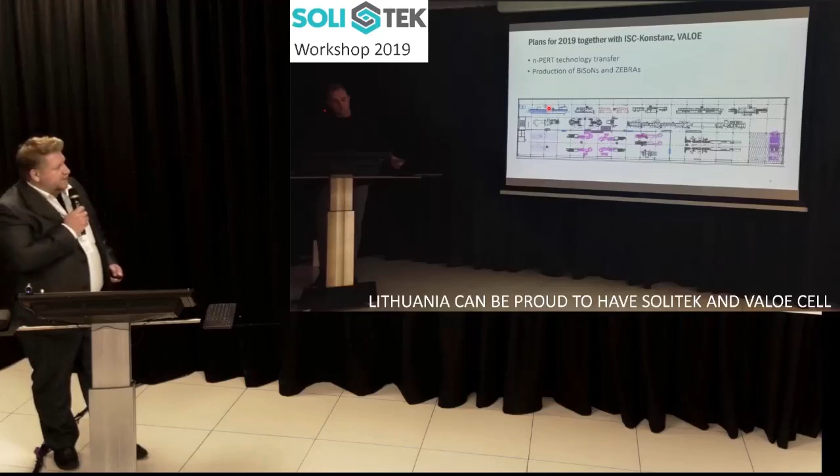And what Valoe is doing, I told you, IBC solar cells, and they are mostly cooperating with Sono Motors to put the solar cell into the car body. So that means in future we will not have only electric cars, but also self-charging cars. And the idea here is, if you have the entire hood equipped with a very effective IBC solar cell, if you leave the car outside, you can charge 30 kilometers a day. So if you are using it only in the city, there is no more charging of the car in future, which is quite interesting. Of course, it's a little bit more expensive, but it pays off in future.

Good. So 2022 is a perfect year for photovoltaics. As I told you, the hunger is there. Since 2020, PV became, with the PERC technology, the king of energy markets. And in March this year, we installed a total capacity of 1 terawatt. And the plans are huge. So Europe wants to install this year 60 gigawatt, which is about 2 to 3 times more than last year.

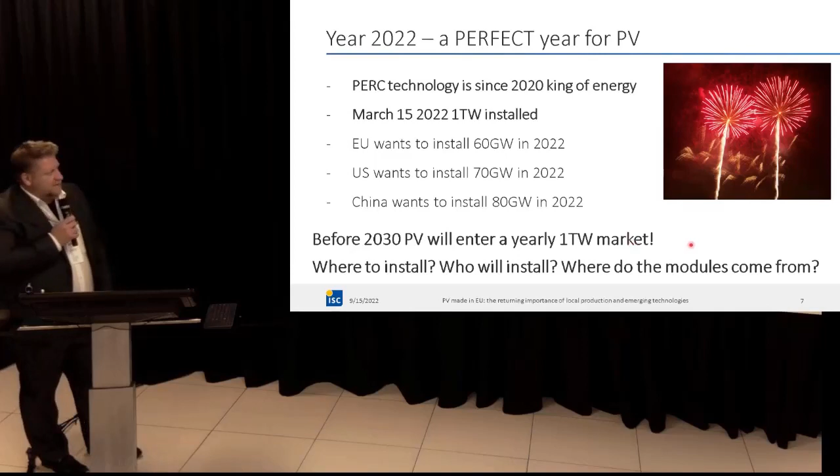And this happened from 2008 already on. So if we learn from the past, and I think we will even accelerate now, that means that in 2028 we will enter a yearly 1 terawatt market. That means the capacities these days are at about 300 gigawatt yearly, so we have to triple this, and that means that there will be room for new investments and new factories out there.

So the US now has some good policies to really accelerate the PV production again. And I think we will hear from Žygimantas what will happen in Europe, and hopefully we will be successful as well.

Yes, so the content: ISC Konstanz, I will show you 5 slides, then some arguments about PV in the EU, and also show you the most important players in Europe, then about PV technology, and at the end I will show you just some examples for bifacial PV.

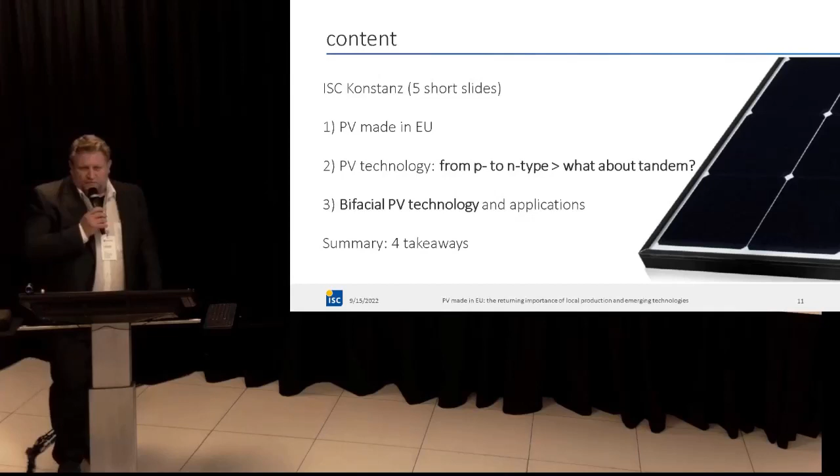So ISC Konstanz, we were founded in 2005. This was the golden time of photovoltaics, where we cooperated with SolarWorld, Bosch, there were many producers. And when everything went to China, ISC Konstanz was involved in technology transfer. So transferring our technology that we developed with Bosch, for example the N-type technology, to India, China, but now also to Valoe. And we are focused on solar cells, modules and energy systems, but do not have different companies, but departments.

So we are involved in technology transfer of PERC technology, this is the main technology now that SoliTek is producing, TOPCon and the IBC solar cell concept. Yes, these are our references. So we started technology transfer after Bosch stepped out in 2015. So we bought our common patents and transferred one technology to Megacell. It was an Italian company, then to India.

Yes, the undisclosed Asian customer, it was REC. Then SPIC is our biggest customer at the moment. And as I told you, Valoe. Here under this roof, they are producing IBC solar cells.

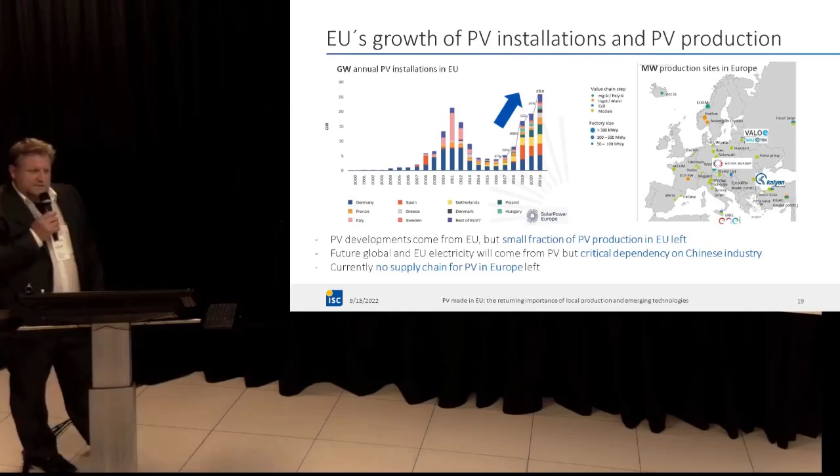So China just cannot produce cells and modules for all the countries anymore. And I think that the big EPCs and companies that want to install modules are already feeling it, that there is a lack of modules out there, and it will be even worse in future.

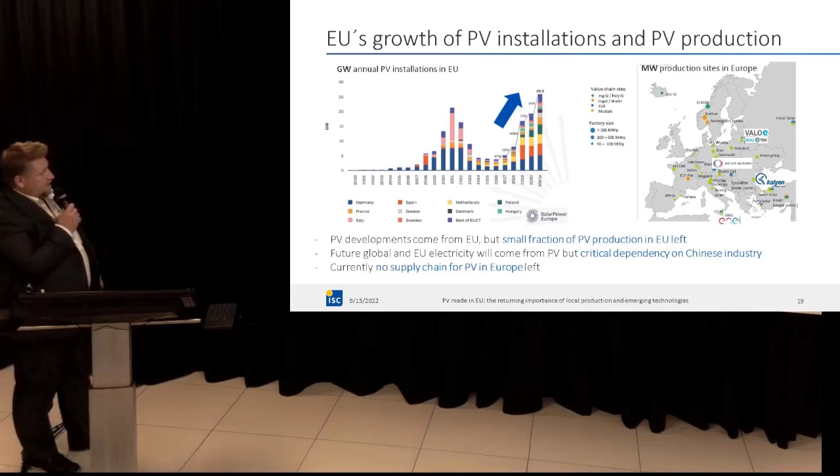And this is my mission now with the European Solar Manufacturing Council and Žygimantas in the lead for the politics: to bring photovoltaics back to Europe. But Europe is quite slow with their policies. I mean, in the US now, President Biden signed a contract for subsidizing production in the US. This is unfortunately not possible in Europe. But I'm quite optimistic that we will also make some good decisions.

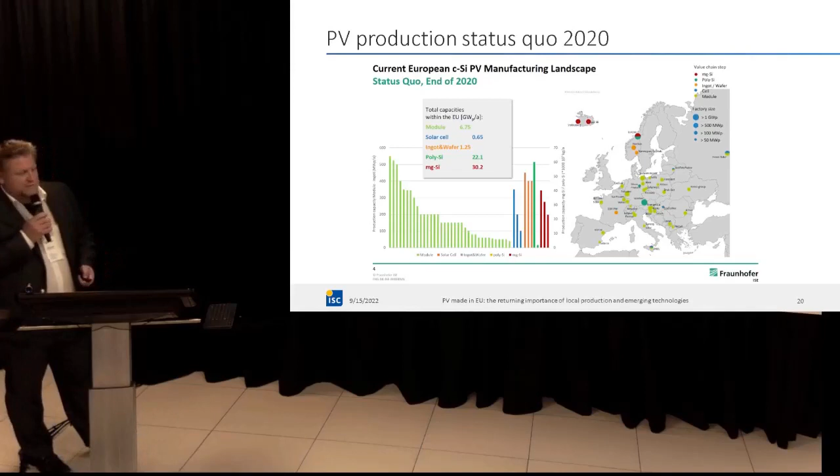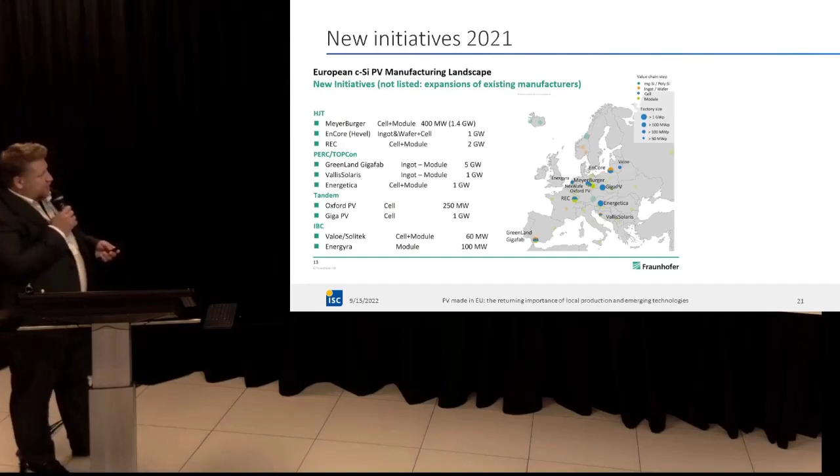So here you see the new initiatives in 2021. What happened? There were many announcements out there. So for example, Meyer Burger was announcing to go to production, and they actually succeeded. So here in green you can see which projects were successful or which projects are online.

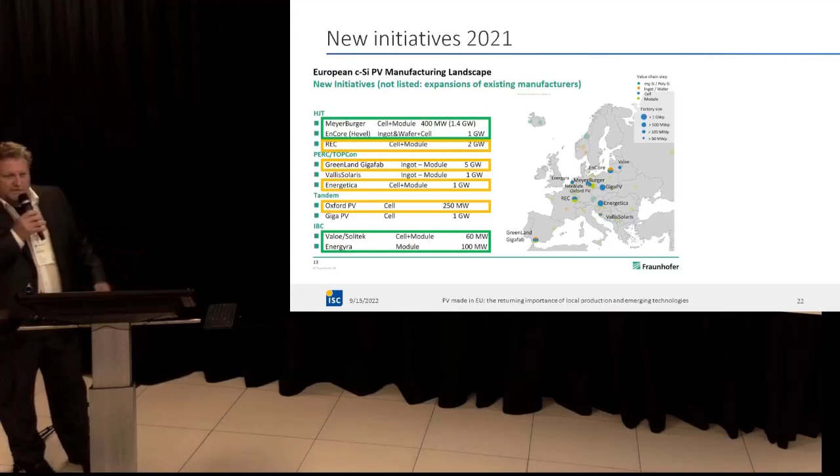REC, they have big plans to go into heterojunction production in France. Greenland Gigafab unfortunately is now on hold. Energetica was insolvent, but I think they are restarting. And there are also some tandem activities. Oxford PV is planning to go into tandem production. I will tell you later on what this technology is about.

But as I told you, Valoe cell under the roof of SoliTek are also producing cells, IBC cells, and Energyra, that's a company from the Netherlands, is also producing IBC modules out there.

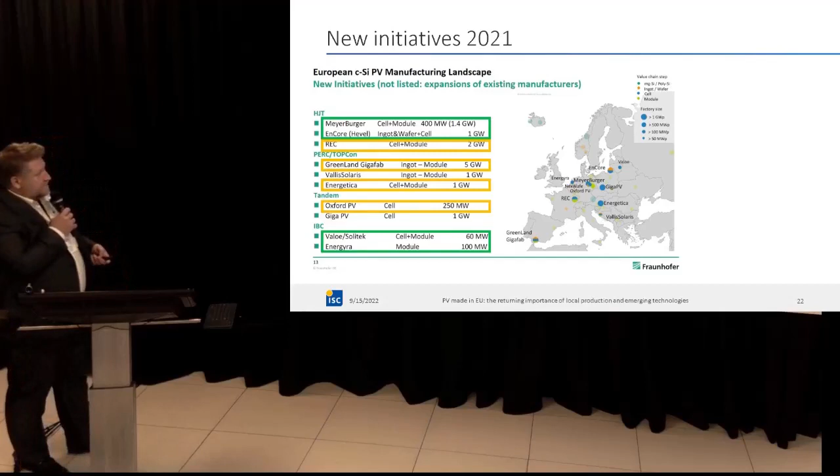The new players, for example, I think you heard the news that ENEL is now going to gigawatt production. As I told you, REC, Carbon now are making advertisement for 20 gigawatt, and they really mean it, and they go vertical integrated, like starting from ingot to modules, because if you start a solar cell production only, maybe you will not get the wafers. If you want to be really independent, you have to produce vertical integrated, like all the products. And it's not only about wafers, but it's also about polysilicon, about glass.

And this is what we are now starting in Europe, actually, to build a big consortium to go into production, similar to the Airbus that we did with France and Germany a couple of years ago. And there is also a company in Turkey, KalyonPV, that increases their capacity now to 2 gigawatts. They are producing already 1 gigawatt vertical integrated PERC from ingot to modules, and now they are moving, similar to SoliTek, also to N-type technology, to TOPCon.

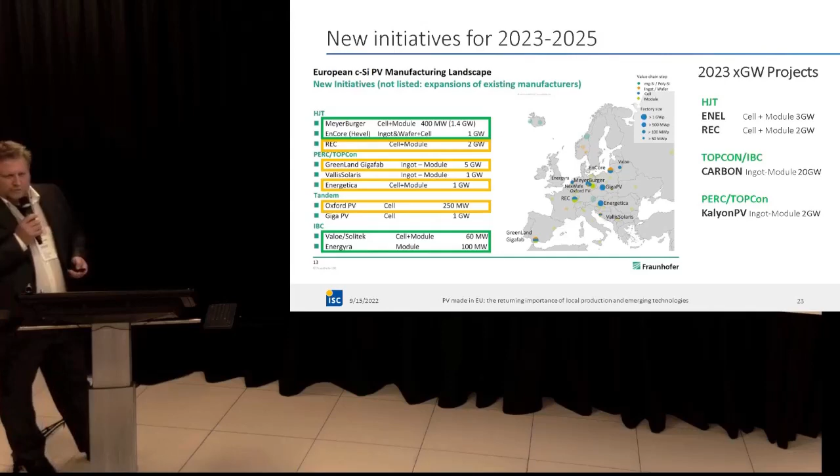Yes, I think I can skip these slides. Sigimantas will tell you more about it, what is necessary in Europe, what kind of measures we have to take in order to bring PV production back to Europe. And yes, I can skip this one.

We have now a big European project with many partners, mainly also machine builders from Germany, Rena, Centrotherm, to develop a new version of the IBC solar cell. We call it IBC for EU, and we are quite sure that this technology can be a strong argument to bring PV production back to Europe again.

And about the PV IPCEI, which we are now doing, I think Sigimantas will report more about that. But in very general, PV IPCEI is an important project of common European interest. And if Europe agrees that photovoltaic production is an important technology, which they already did, and countries like Lithuania are very committed, Spain, and we are now in the process to submit proposals for the new technologies that will be produced in Europe, then Europe will in future be able to subsidize PV production. The countries where the commitment comes from will be able somehow to subsidize, which is not so easily possible in Europe. You will hear more info about that.

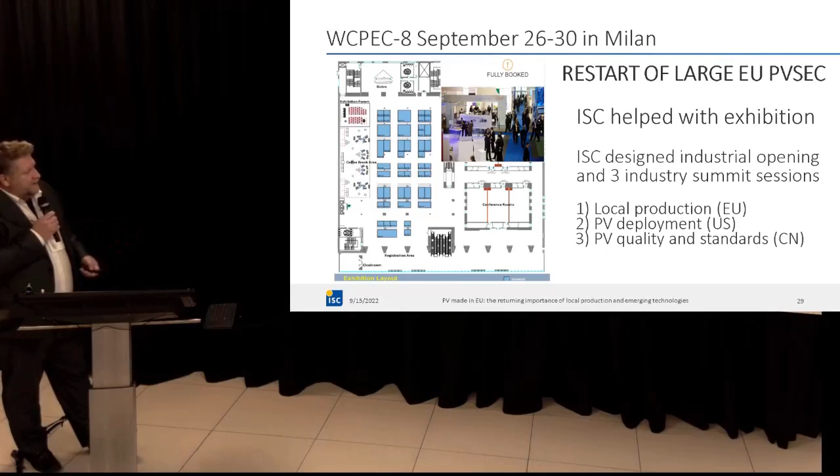Okay, and for an important PV technology to be really successful, we have to do it all together. And this year in Milan, in September, there will be a world conference on photovoltaics, and for the first time after a couple of years of PV desert, the exhibition is now fully booked. So I am very happy that we will meet there and discuss how we can really achieve to bring PV back to Europe.

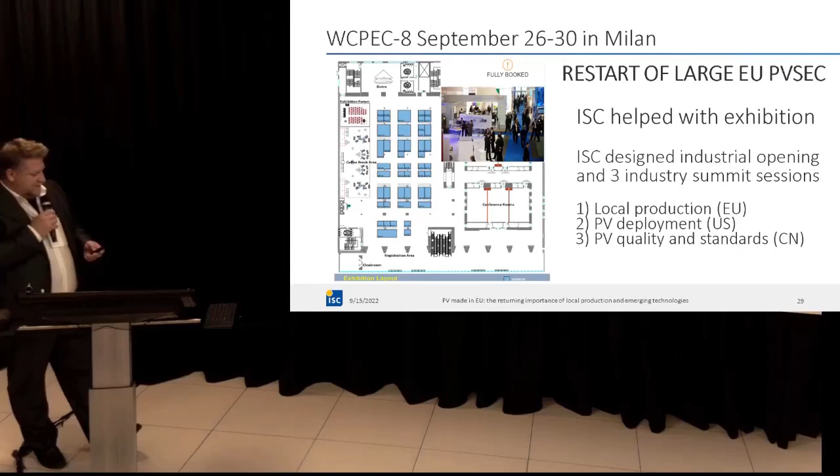Okay, so these were quite political things and some information about what is happening in Europe, but now about PV technology, and I always call it entering the bifacial N-type era, because P-type, like the PERC solar cells, come to their efficiency limits, but now it's time for N-type technology, and I will tell you why.

But maybe you heard about it. There's a big discussion now, should we buy polysilicon from China because of forced labor and things like that. So we need actually also to install more polysilicon production in Europe. And we have a big polysilicon producer, which is Wacker, but they normally use this material for the electronic industry. So we have to convince Wacker to scale up their polysilicon production.

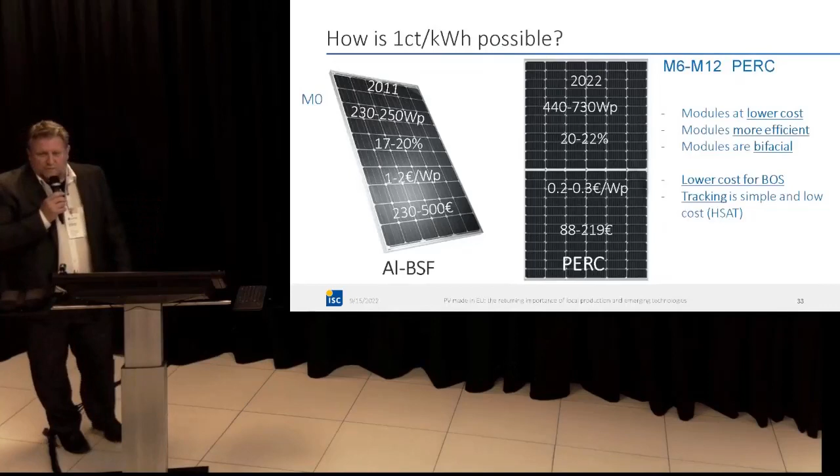As I told you, PERC is the king of energy markets these days, and that's the major product of SoliTek. So if you look at the modules 10 years ago, not only was the power smaller, but also the design was kind of different, like full cell and smaller modules. Now we have half cells and so on. So the modules are at lower cost because of higher power, a more efficient front side, but also because of bifaciality. And if you combine it with the lower cost of balance of system and also tracking, then 1 cent per kilowatt hour is possible.

Of course, the average is not 1 cent. In Saudi Arabia, they have different financing models. So the average is about 3 to 4 cents per kilowatt hour these days. But how can we go even below that? So that means you have more kilowatt hour per kilowatt peak for the PERC module compared to the aluminum back surface field. And how can you go even below that is to go to N-type technology.

It's very related to the PERC technology, but you are changing to the N-type substrate and also partly the process. But let's say the PERC production sites can be upgraded. And then you have even more efficient modules. You have seen the forecast of the power. Then very important is also less degradation and a lower temperature coefficient. That means if you are increasing the voltage of the module, then the temperature coefficient is lower.

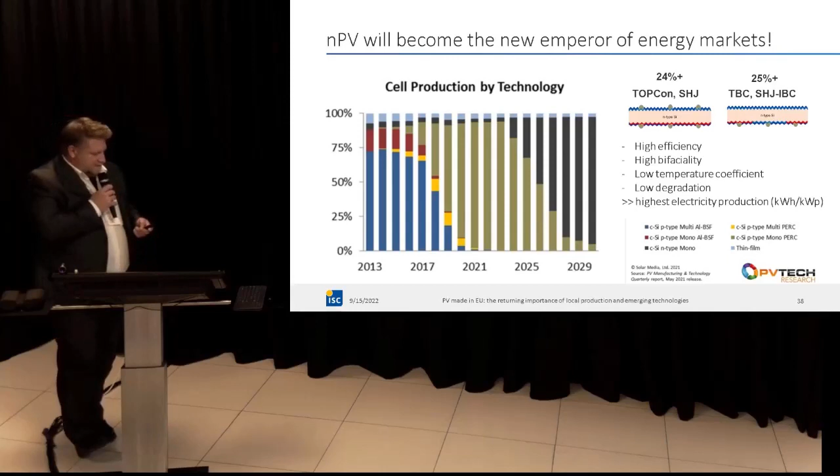So what will happen in future is that we will have a similar change to N-type now. So this is the PERC, and we are now in 2022, so about 10% of the market share is N-type, but analysts believe that it will be also a fast change now to N-type, similar as for aluminum back surface field and PERC. So this is, I would say, the most important slide for you to understand.

It's a technological slide where you can see the yearly improvements of the efficiency on the PV market. And as I told you, in 2016-17, the aluminum back surface field came to its limits, mainly because of the rear side passivation. So actually every improvement is based on better quality of the passivation of the solar cells on the front and on the rear side.

And so what actually mainly changes is the voltage. So for aluminum back surface field, you had voltages of about 660, a little bit more. Then for PERC, you can go to 680, maybe 685 with selective emitters.

But to go above 700 millivolt, you have to change to N-type and to so-called TOPCon technology or heterojunction and IBC. And there you can see also that you are not only passivating the rear side better, but also the bifaciality is enhanced. Here you can see the open side of a PERC solar cell, and because you are using aluminum, the bifaciality is about 0.7, and here you can go even to 0.9 or even above that.

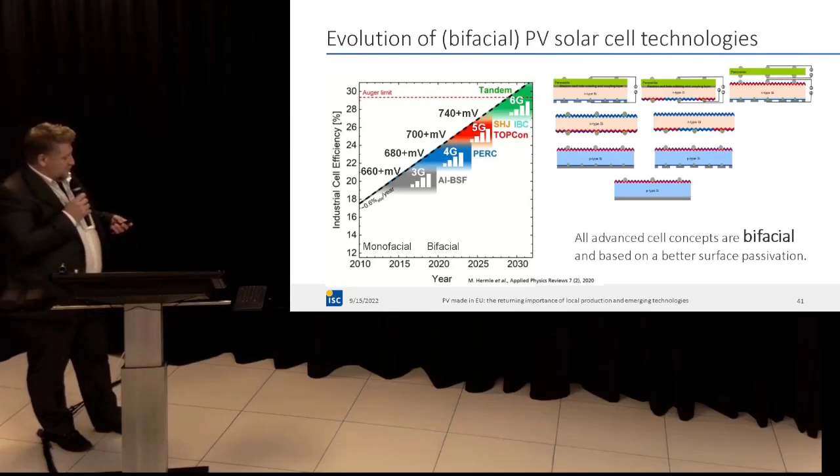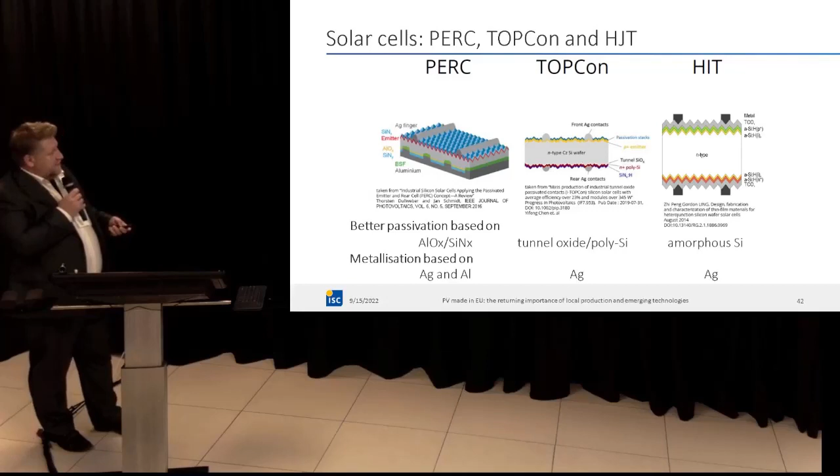So the efficiencies are increasing, and as I told you, PERC is the working horse, TOPCon is the major challenger. I believe that heterojunction will still stay in niche markets, but the interesting thing is that they have the highest bifaciality. And IBC is the holy grail, actually; I believe that after 10 years of development, everything will run on IBC technology.

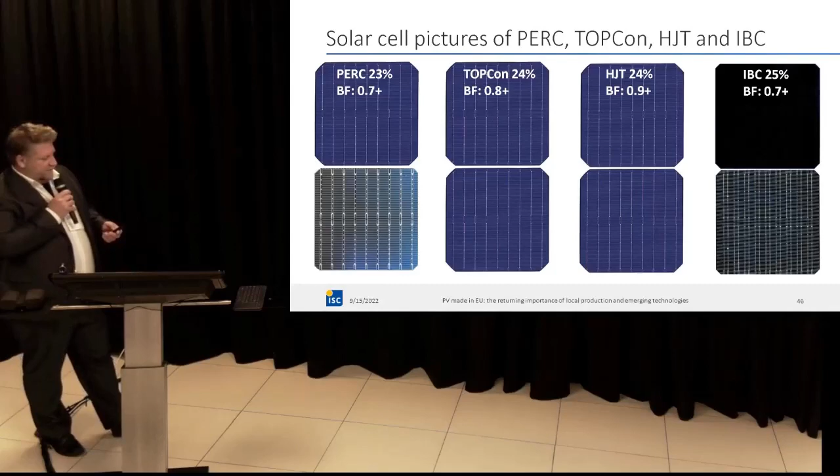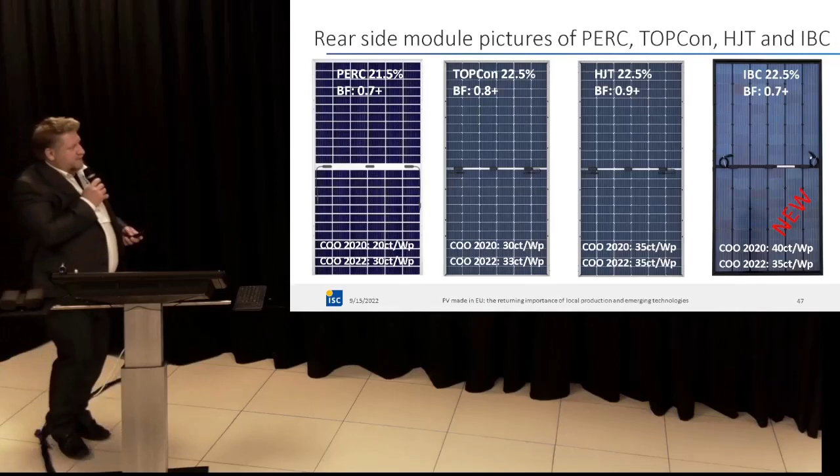Here you can see the pictures of the solar cells from the front and from the rear. The IBC cell is, of course, different from the others, so you don't have any metal on the front side, but both polarities on the rear side. Here you can see the modules. IBC technology can also be bifacial, even if there is quite a lot of metallization on the rear side. But all technologies look, of course, quite similar in modules.

If you look at the highest efficiency modules out there, the highest efficiencies, of course, are N-type technologies, but for the moment they are still a little bit more costly than PERC, and that's why they are used mainly for rooftop application or for building integration.

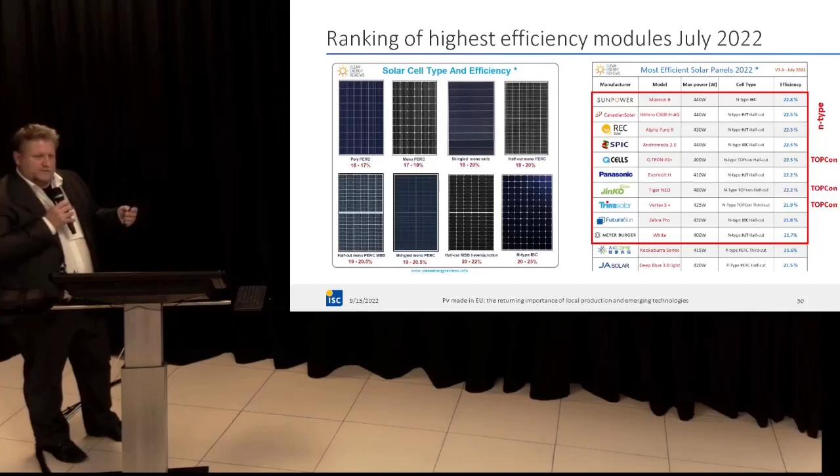Future material challenges, as I told you, polysilicon. We are currently in a polysilicon crisis. Silver has to be reduced because N-type technologies are using silver. Heterojunction has one more disadvantage, the indium that is included there, and also glass and aluminum. If we enter a yearly 1 terawatt market, it will become not a problem, but a challenge. And it has been also mentioned by SoliTek that circular economy with effective recycling will be more and more important, of course.

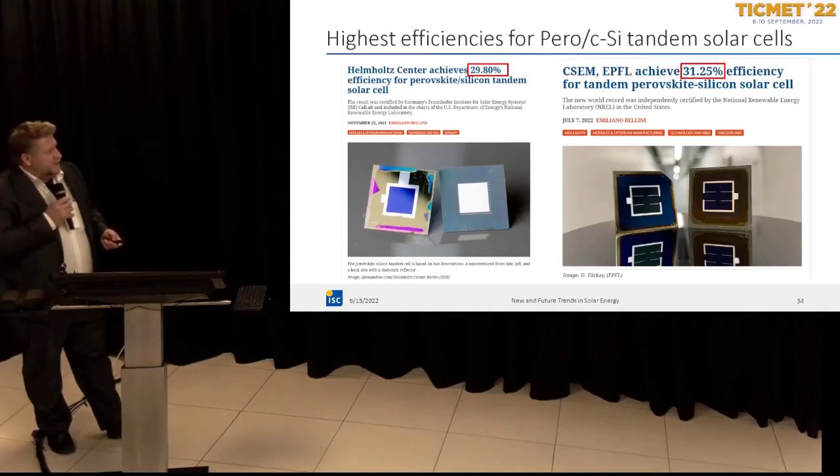Yes, I already told you, tandem technology, there are many high efficiencies out there, even exceeding 30%, because putting another semiconductor on top of silicon, you can go above the Shockley-Queisser limit. But the challenge is the stability and many other challenges. Nevertheless, I explain to you very shortly the different arrangements of tandem technology.

You can go for 2-terminal, where you have directly on the silicon the perovskite, and you have the polarities on top and bottom. If you are using an IBC solar cell, you have a so-called 3-terminal solar cell with 3 polarities, or we are putting 2 modules on top of each other, and then you have 4-terminal. I'm a big fan of 4-terminal, even if you have 2 modules on top of each other, which sounds costly, but it's, I think, the easiest way, because you don't have to do the so-called current matching.

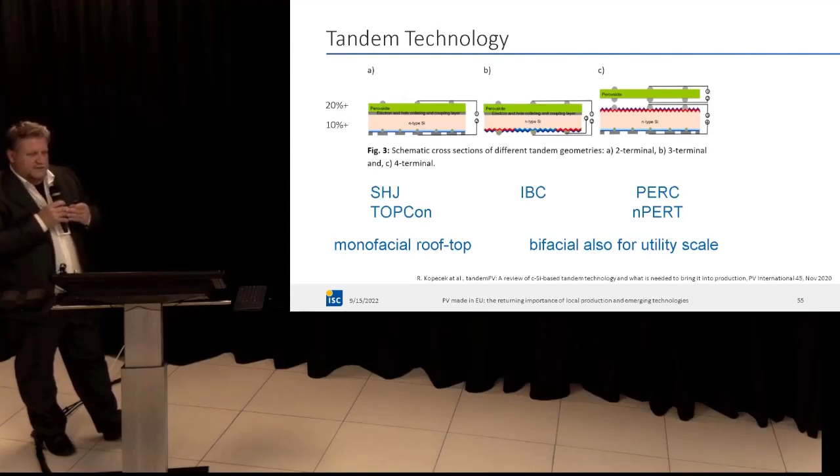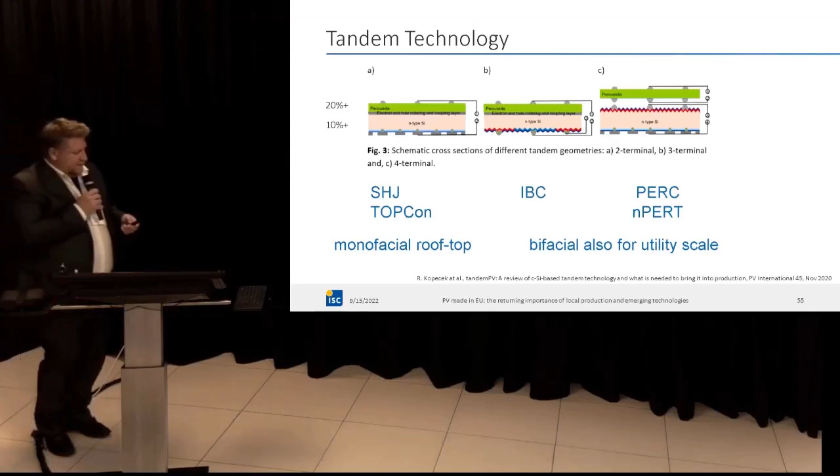Here you have to really adapt the 2 semiconductors towards each other, and that's extremely complicated. So putting 2 modules on top of each other makes more sense, and also you can have quite good bifaciality for this kind of arrangement. But I think it will take more than 10 years for this technology to be visible. What I mean by visible is that we have about 5% market share. Of course, there will be companies like Oxford PV with some niche applications for rooftop or maybe car applications, but really in big scale, it will take a lot of time.

How much time do I have? It's 5 minutes? Ah, that's perfect.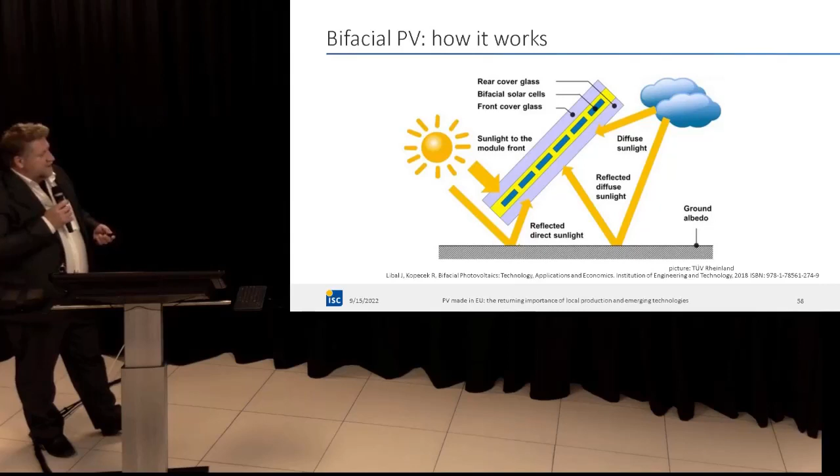So now I show you some pictures of bifacial technology. Here you can see how it works. The front side is still more important than the rear side, of course, but depending on the clouds or the albedo of the ground, you have quite a lot of power also coming from the rear side. And when we started to do advertisement for bifaciality, already in the year 2000, there were not many believers because they were selling modules without any problems, whether bifacial or not. But in 2018, people were thinking to diversify from the other producers and going bifacial.

I think the biggest company at that time that really made the difference was Longi, a big producer that was saying that bifaciality will be the future. And in Europe, SoliTek was one of the pioneers that brought bifacial modules on the market. But from now on, I think it's quite clear that bifaciality is the winner, and not because it's a big revolution, it's just an evolutionary process. I told you the evolution of the solar cells. They become bifacial anyhow, and people are making glass modules anyhow, so it's just a logical consequence that bifaciality is gaining importance.

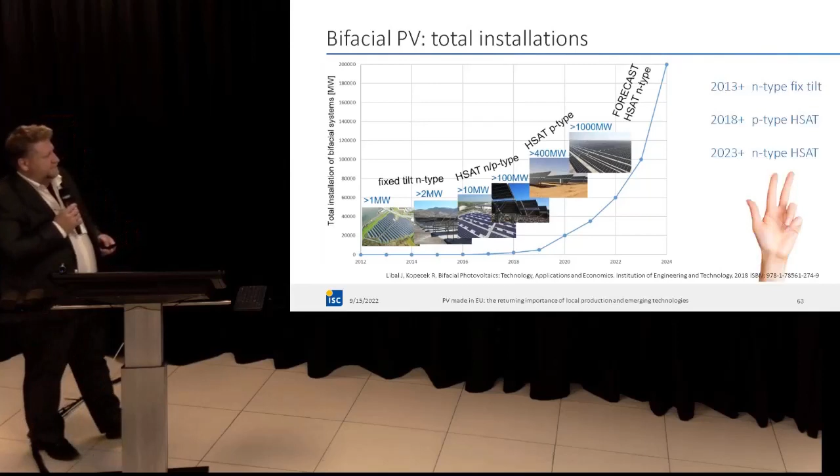Yes, you can see some bifacial arrangements. So bifacial tracking, we already talked about, that you can have the largest production curve if you make an integral, or if you are installing vertically.

This is also quite an interesting arrangement, what we do with our partner Next2Sun in Germany. You have quite an interesting shape of a feed-in curve, so you have quite low electricity at noon, but quite a lot in the morning and in the afternoon. And you can also use the land two times, because the ground coverage ratio is almost close to 0.

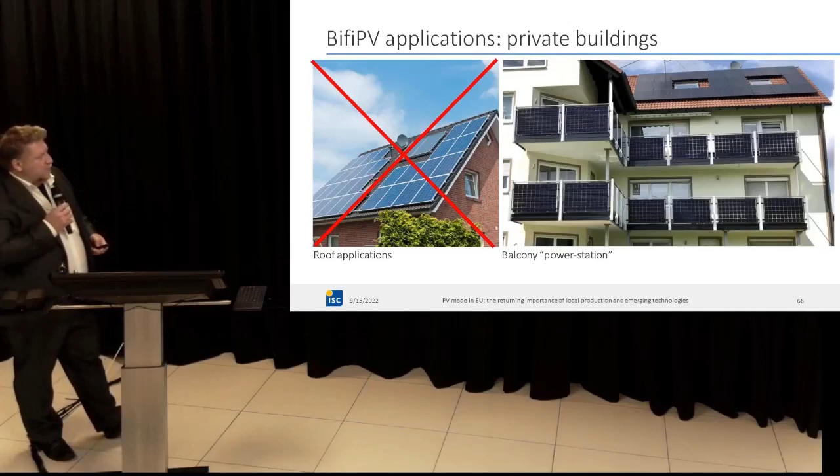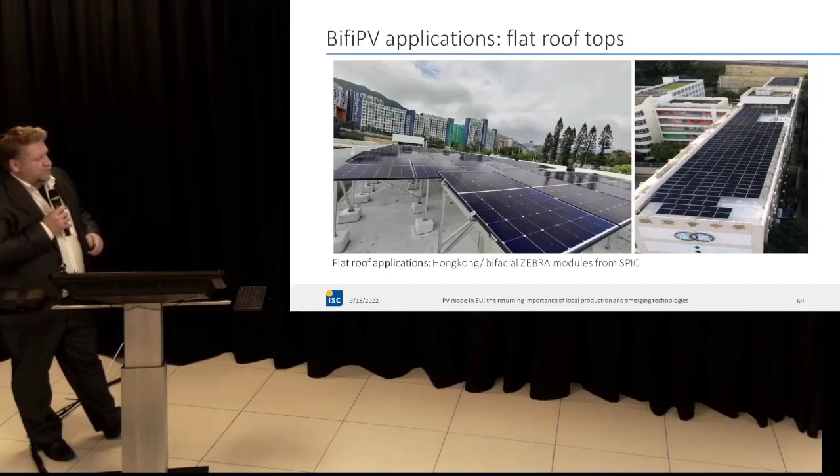For standard rooftops, bifacial modules do not make a lot of sense, but for the balcony application, which is now more and more installed in Europe, it makes sense to install bifacial modules, because you can have reflection also from the wall. You can also go for flat rooftop application. Then bifaciality also makes a lot of sense. If you, for example, also condition the roof, you can paint the roof white, or you can even do tracking on a flat roof. Of course, you have to have quite a stable rooftop.

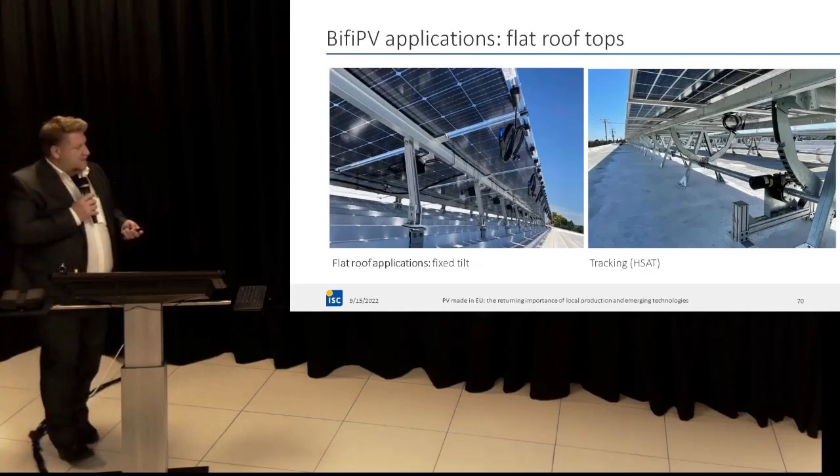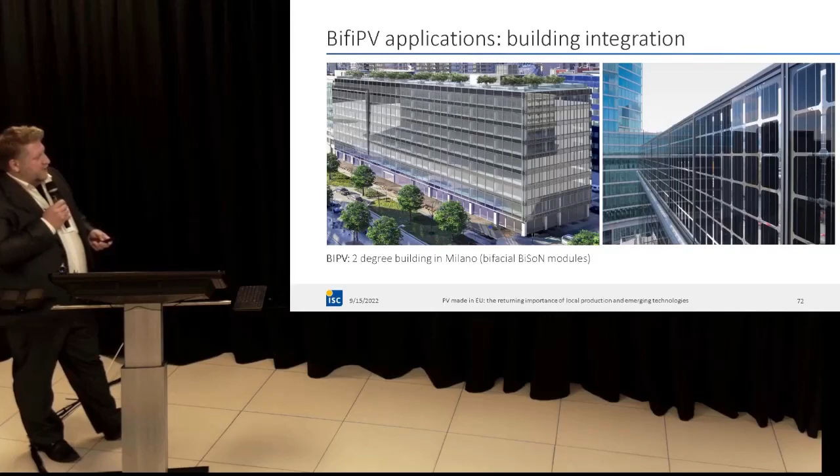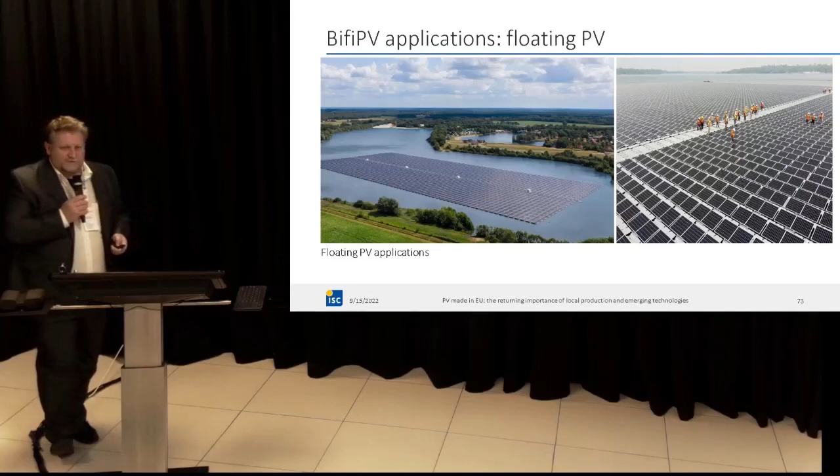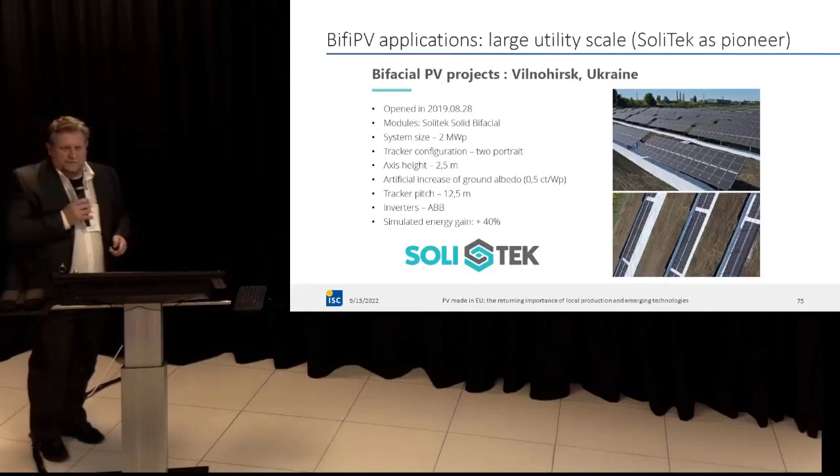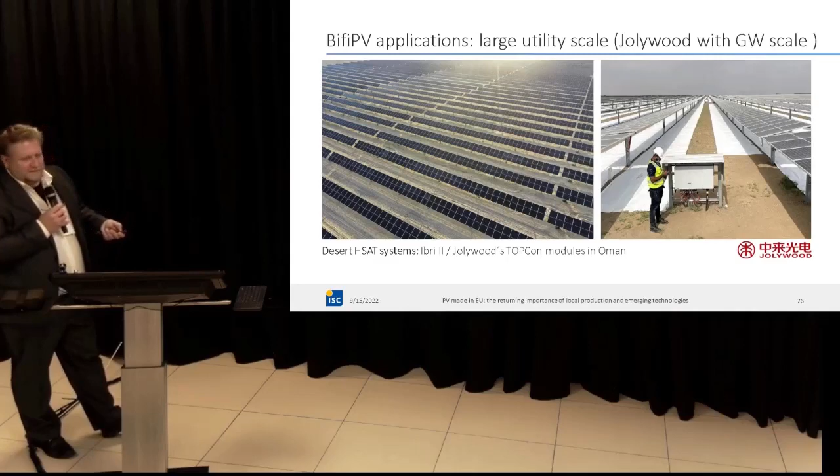Yes, we already talked about it, that N-type bifacial is not only for buildings. Now it's more and more penetrating into the utility scale market, and Jolywood, for example, now installed a large 700 megawatt system in Oman based on TOPCon technology, and as you can see here, I think they are copying SoliTek. So the Chinese are also copying Lithuanian technology, in that they are putting white reflectors below the modules.

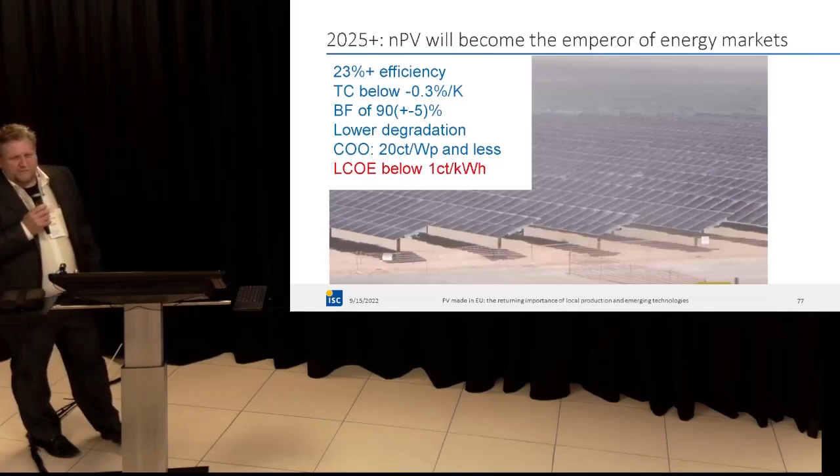So my last slide, more or less, when I come to the conclusion, is that my dream is to have in future N-type modules of 23% efficiency with a very low temperature coefficient, a quite high bifacial factor, and lower degradation. And the modules, I think, do not have to be too costly. It's not necessary to see modules in future for 10 cents per watt peak. We can stay at 20 cents and improve the properties of the modules, and still you will get an advantage, and you can go below 1 cent per kilowatt hour in large utility scale systems.

So the 4 takeaways for today, not 3 but 4. More modules will be needed in future than current production allows. So actually local production is extremely important. Bifacial PERC at the moment is the king of energy markets, and we will see more 1 cent per kilowatt hour announcements out there, of course mainly from the MENA states. The average is at 3 to 4 cents per kilowatt hour.

Bifacial n-PV will be the new emperor, and SoliTek is prepared for that. So TOPCon and heterojunction will be used, and IBC is then, let's say, the winner. And tandem technology will still need about 10 years or even more to come into the market. There we need some upscaling, and stability issues have to be solved, and also reverse behavior and similar.